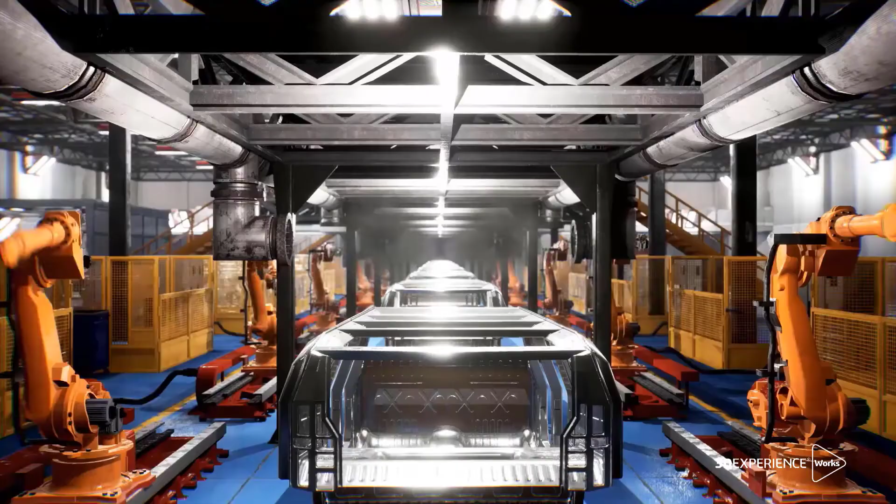The industrial equipment industry is undergoing a revolution. The purely transactional business of the past is being replaced by a service-based model. Machine reliability becomes very important to avoid loss of service revenues due to downtime. Think about the consequence of downtime of farm equipment, where an entire crop can be wasted if not harvested on schedule. At the same time, customers are looking for products that can perform ever more complex and smart functions. This means equipment manufacturers must design and verify a wide variety of products meeting short delivery schedules with minimum cost.

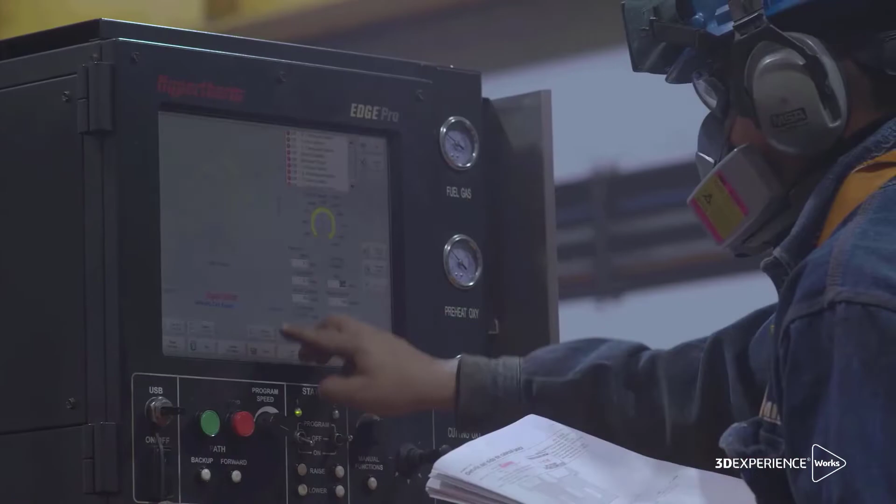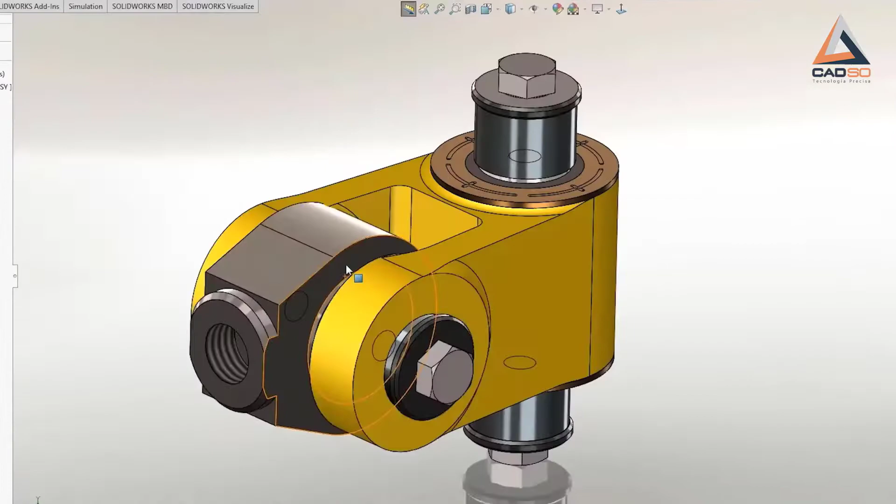CADSO provides us with technological solutions for the design, analysis, and management of our equipment. The SolidWorks portfolio helps us to conceptualize, create, validate, locate, manage, and transform our innovative ideas into excellent product design for the manufacturing of mining drilling equipment.

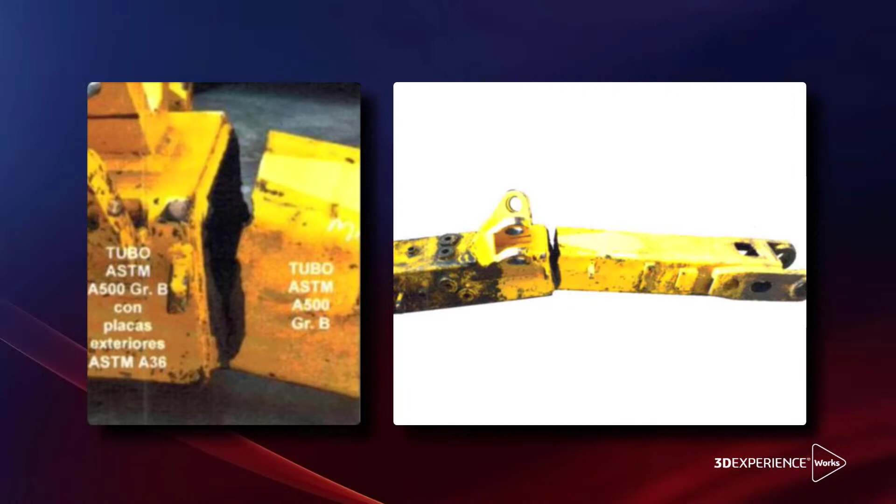Expensive physical tests and field failures can be minimized by leveraging the power of structural simulation roles within the 3DEXPERIENCE Works portfolio, leading to faster time to market. Embedded in the cloud-based 3DEXPERIENCE platform, the structural designer role enables users to quickly assess stresses and displacements for various load cases on individual parts and large complex assemblies alike.

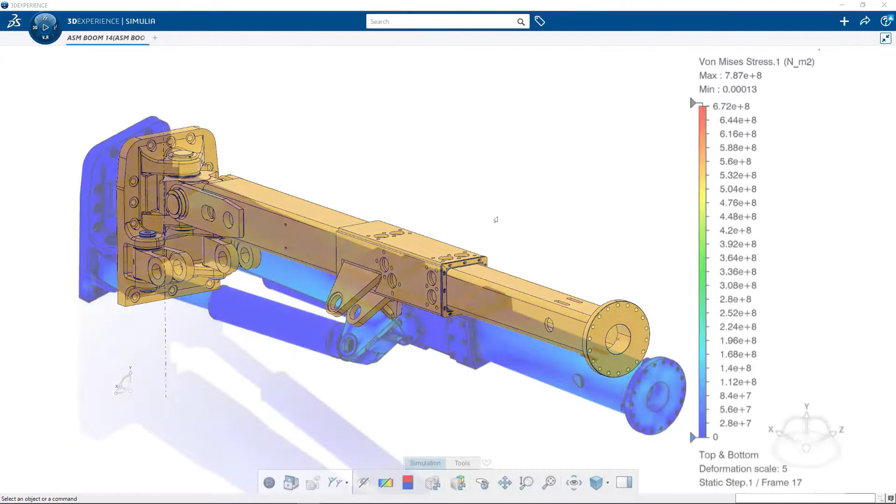Engineers at Resemin can quickly set up linear static simulations directly on native SolidWorks CAD geometry of this boom assembly, with minimal interaction.

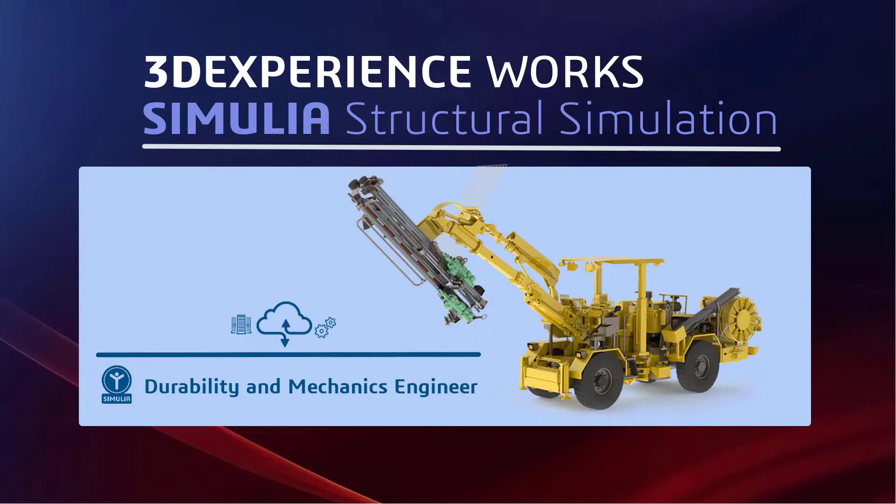Additionally, the durability and mechanics engineer role allows engineers to assess structural reliability for fatigue failures. Engineering managers at Resemin can take advantage of lightweight visualization and collaboration capabilities on the 3DEXPERIENCE platform to review the latest CAD and simulation data, guide improvements, and approve final revision.

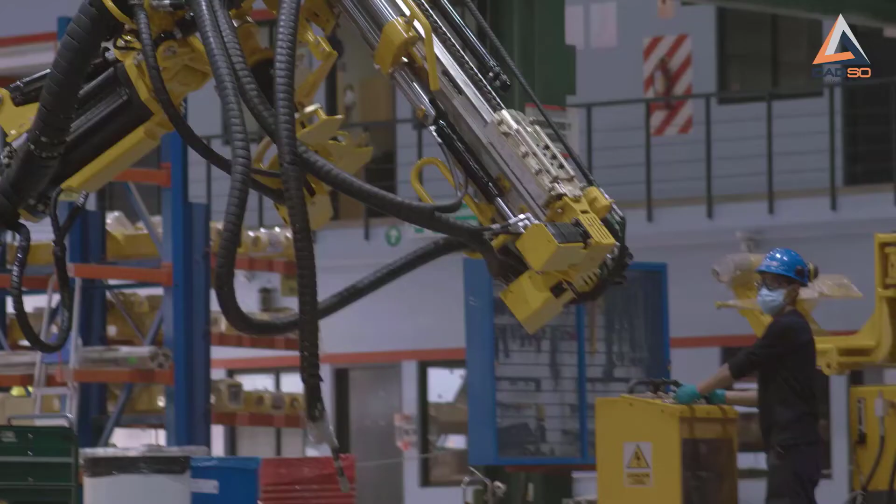We've been using SolidWorks to develop products for more than 10 years. This has enhanced our capabilities in designing machines and marketing them with a more collaborative environment in the company. In that time, we've gone from manufacturing 3 to 4 machines a year to more than 130.

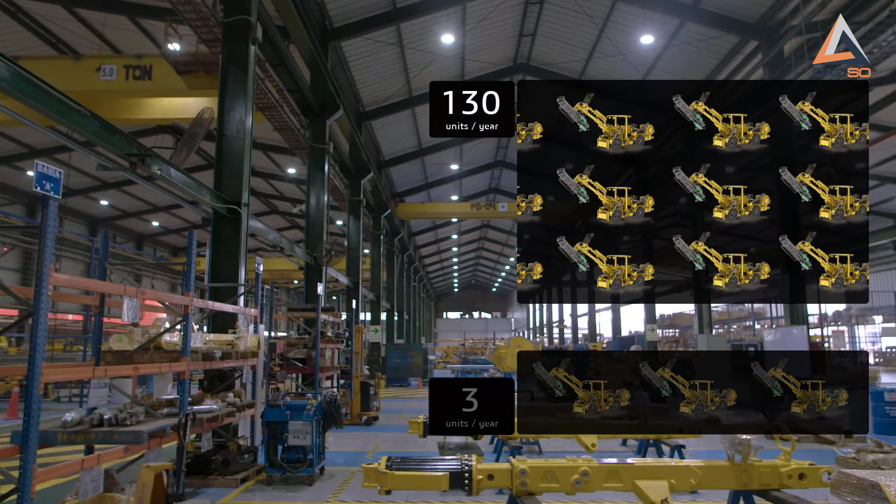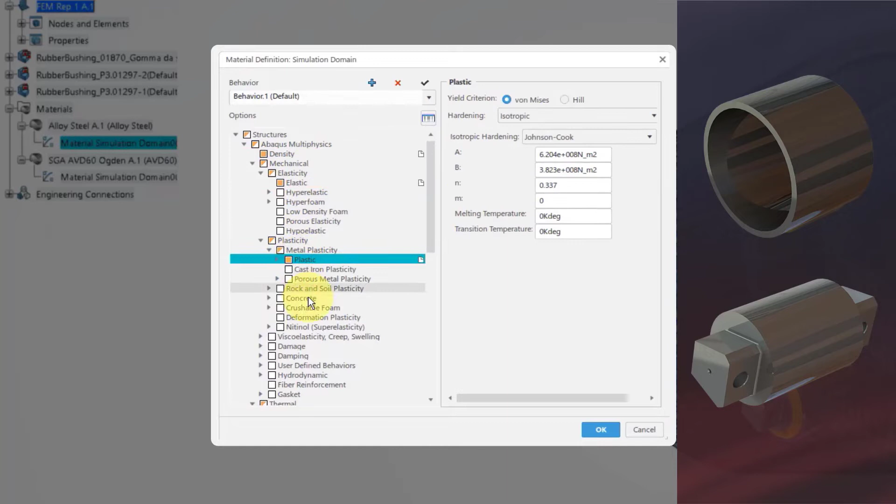The structural mechanics engineer role brings advanced nonlinear static analysis capabilities for designers using SolidWorks to reduce elastomer residual stresses in industrial equipment components like rubber bushings and seals. In the case of this rubber bushing, alloy steel material is applied to the outer ring and the inner hub. A hyperelastic material is applied to the rubber part of the bushing.

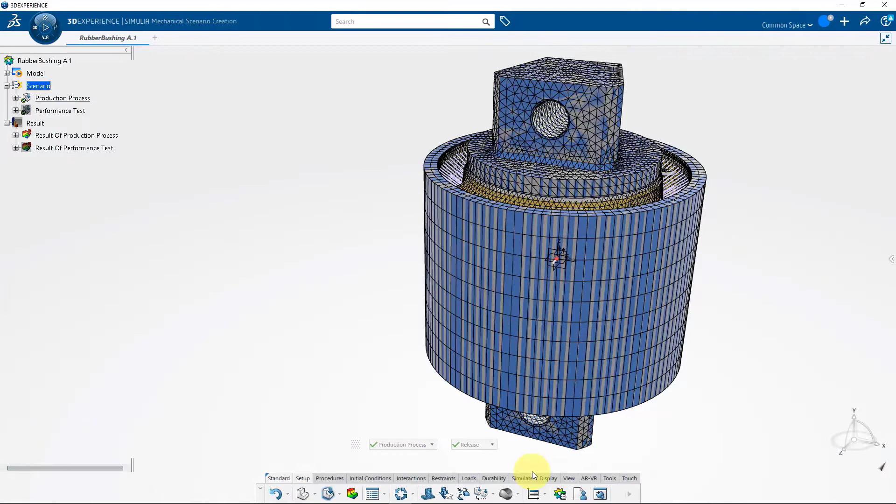Multiple material behaviors can be combined together, such as elastic, plastic, thermal, and thermal structural expansion capabilities, to capture the physics scenarios experienced by these components during the manufacturing and testing stages. Powerful restart capability allows users to choose results from a previously performed analysis as a starting point for a new analysis case. Results from 2 or more simulation scenarios can be compared side by side.

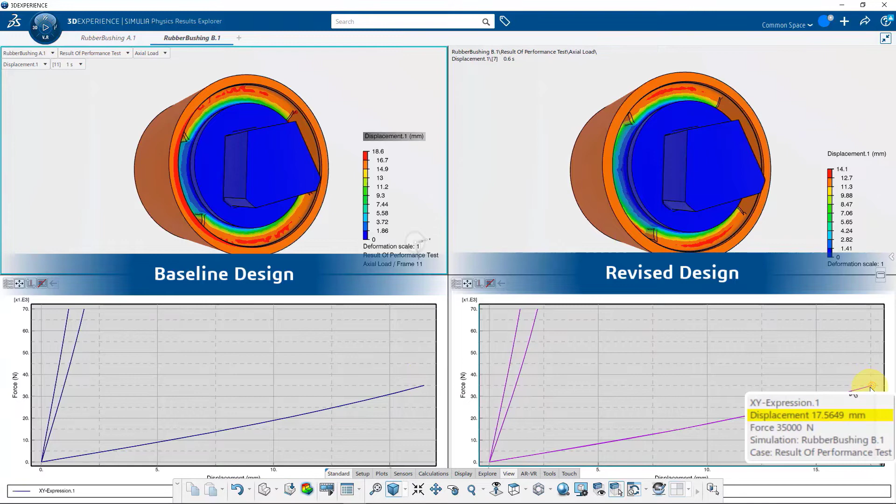Here, the designer is visually comparing field plots for displacements, stresses, and XY plots for force versus displacement stiffness response between the 2 rubber bushing designs.

Let's take a look at another example. Omax is a water jet cutting machine manufacturer. Their abrasive water jet machines experience low and high frequency vibrations during operation, which could lead to breakdown.

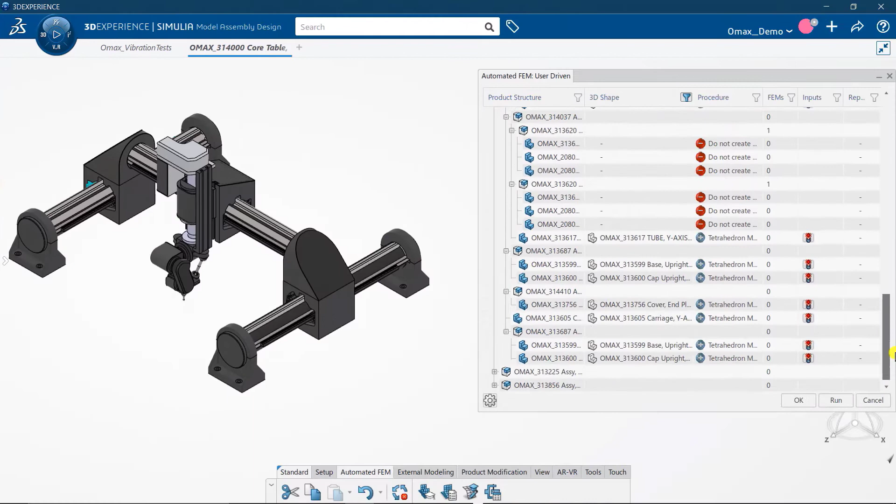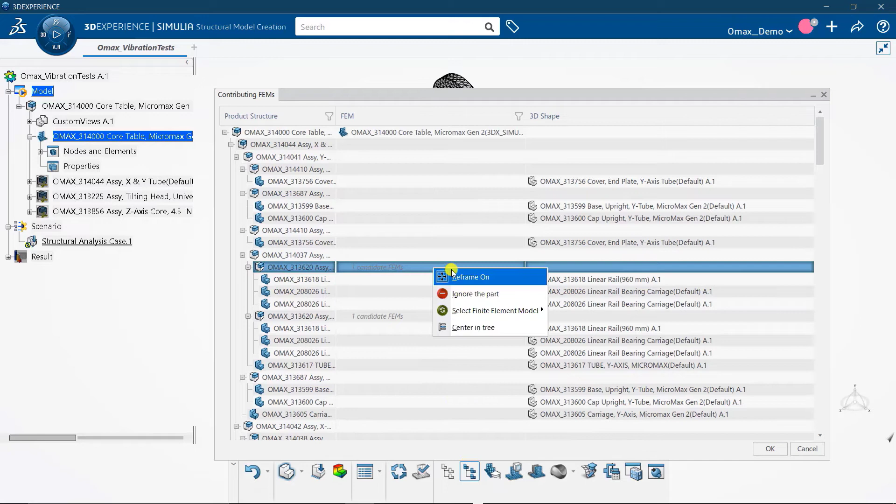Automated FEM capability, offered by the Structural Performance Engineer role, enables users to focus more on engineering by automating redundant and unproductive tasks, such as mesh definition for every single part. The Contributing Shapes Manager works in conjunction with automated FEM to include and exclude components. The Contributing FEM's Manager helps to reference and reuse an existing mesh from a component level into the main assembly.

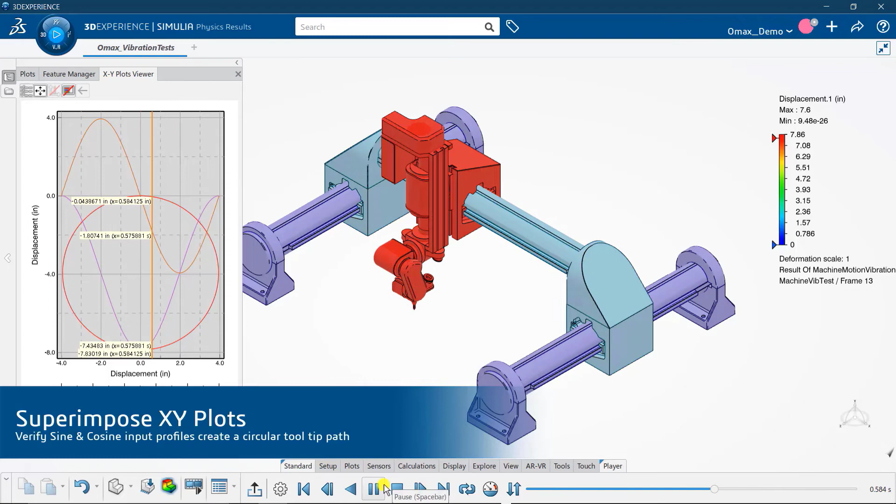The Advanced Implicit Dynamics Simulation capability helps engineers ensure the dynamic stresses are small and within linear range, while the tooltip displaces in a circular path. Insightful animations and engineering quantities can be superimposed for visualizing instant responses, as well as ensuring expected behaviors of the assembly, which is critical in achieving manufacturing precision.

Key stakeholders at Omax can easily review structural performance data on a web browser and seamlessly collaborate within the fully connected environment of the 3DEXPERIENCE platform. This digital continuity not only breaks silos, but also increases productivity significantly, thereby reducing design cycle times.

With SIMULIA's structural simulation roles included in the 3DEXPERIENCE Works portfolio on the cloud, you can reduce prototyping and warranty costs, enhance brand value and product portfolio, and accelerate innovation and time to market.